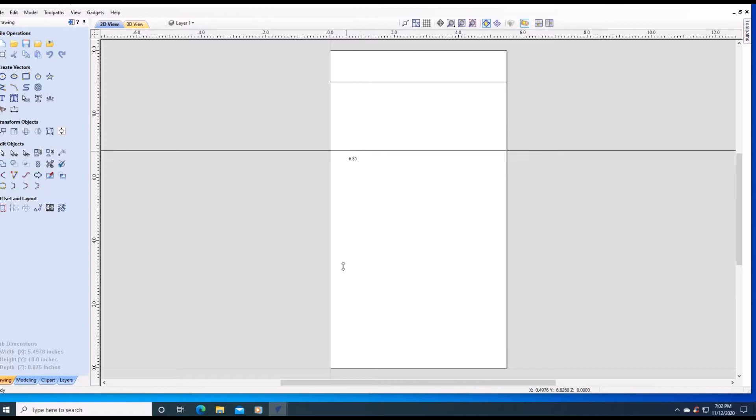So now, spacebar, close. Now what we're going to do is get some guidelines. Left click, we're going to go about 1.75. We need another one about 0.2 for the X. That's going to help us with our project. I'm going to get a line at about 1. Click and bring it down to that guideline, almost to the end. That's going to be the tilt of our Christmas tree. Spacebar, close.

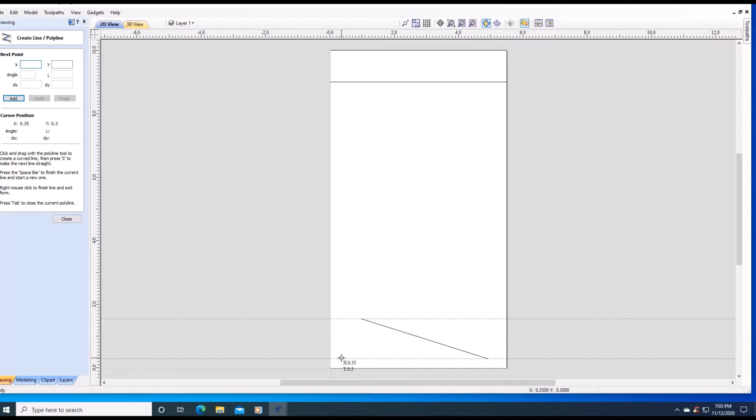Now we're going to start drawing the tree. Another line. Go up, click. A little bit up, click. All the way up, click. Go down like about. Now if you try doing this freehand, you'll never succeed.

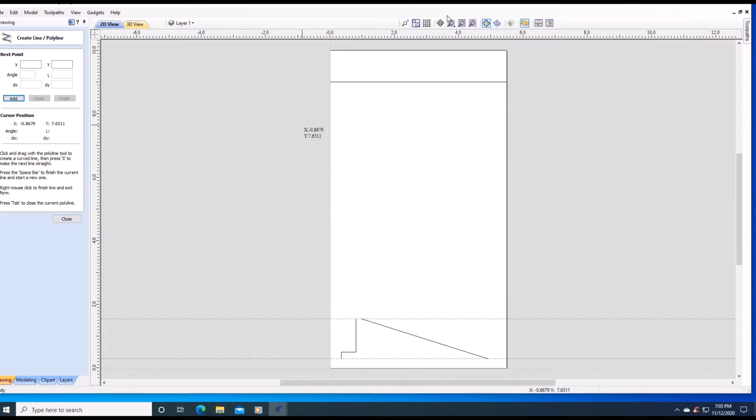So what we're going to do, we're going to stop and put some more guidelines. What we're going to do is close the line, bring down the guideline the other way to the left, bring it over for our first one. Now we have our guideline there. We're going to right click, use the absolute position, and we're going to space our branches at 1.25, then at 1, 0.75, 0.5, 0.25 as we're going from left to right.

To show what we're going to do, we're going to use absolute position. Our first one is going to be at 2.25, create new guideline. Our next one is going to be at 3.25, create new guideline. Next one will be at 4, create. 4.5, create. 4.75, create, and that's going to take us almost to the end of the tree, so now we can close.

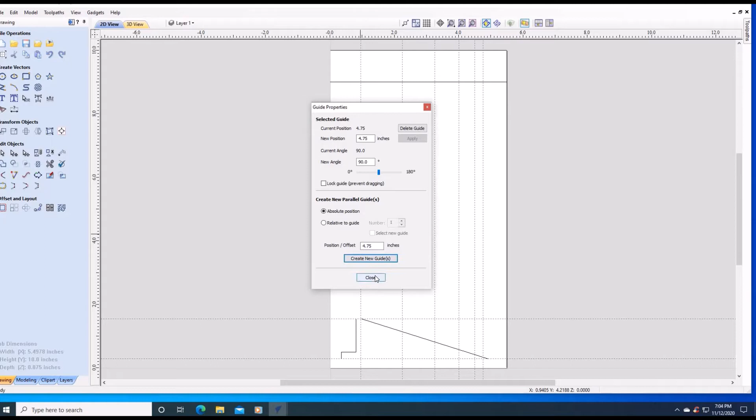So now what we can do, because we didn't hit our guide, we're going to just cheat a little bit. We're going to go to node editing, and we're going to move this node up, and then move this node to touch. So we're cheating a little bit, but that's alright.

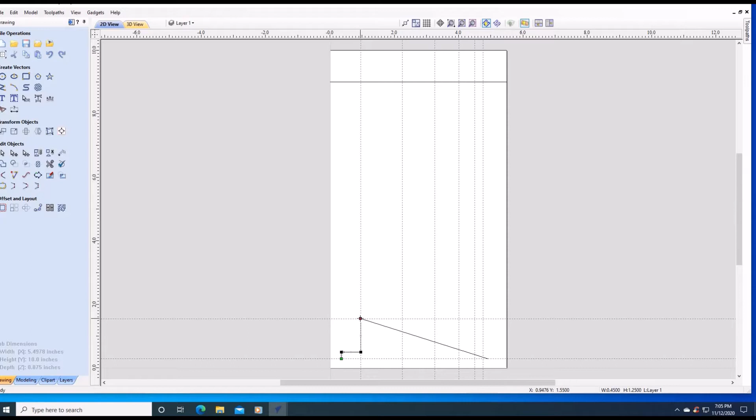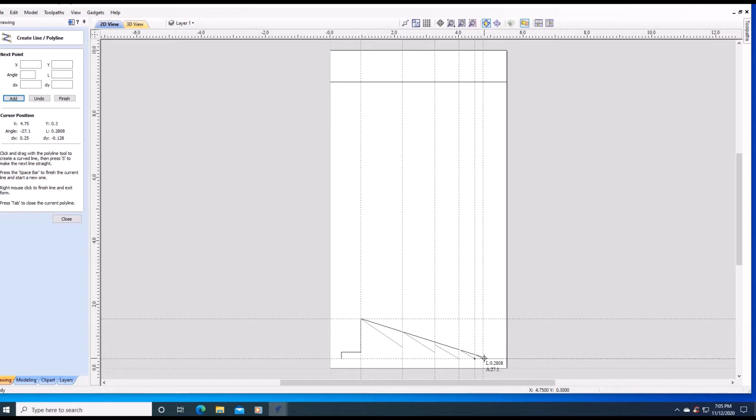Now we're going to continue from here. We're going to click, add another line. Going down, and then up almost to the line. Click, go to the next one. Down, go up, click, go down. Go up, go down, go up, and down. Spacebar. Now we got our branches for our tree.

Click on that line and we'll get rid of it. So if you look, it's alright. How do we end it? Well, I say we put a circle on it. That's a little too big.

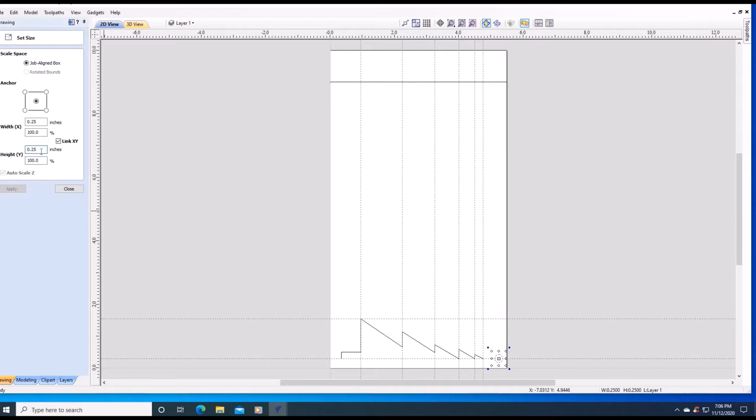Close, we're going to resize it. We're going to say the height, let's do a 1/4 inch circle. Click OK. That looks a little too small. So let's go like 0.35. Apply, let's move it over. That looks pretty good. So now we're going to magnify it because it's really small.

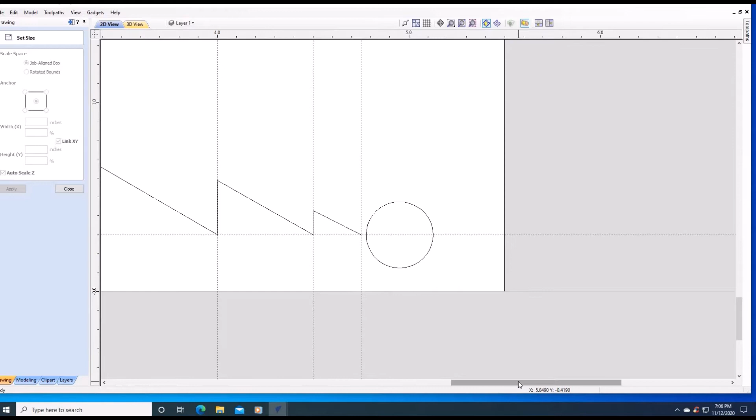It's not touching, so we'll move it over. Say touch. Now we're going to close this, and go to node editing. Click right here, and cut vector. Click right here, cut vector. That's what we don't want. So there we go to our circle.

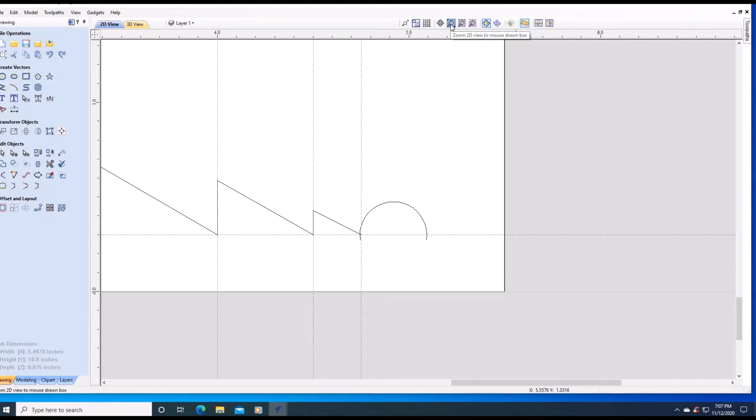Now I'm going to show you something that's wrong, but so you learn how to work your way through this. We're going to go back to node editing, and finish this up. Go all the way to the bottom. Right there, we got a problem because they're not connected. So click, and click, click, so they're joined. We have one open, one closed. So that looks good. So when we click on it, now it's still not done.

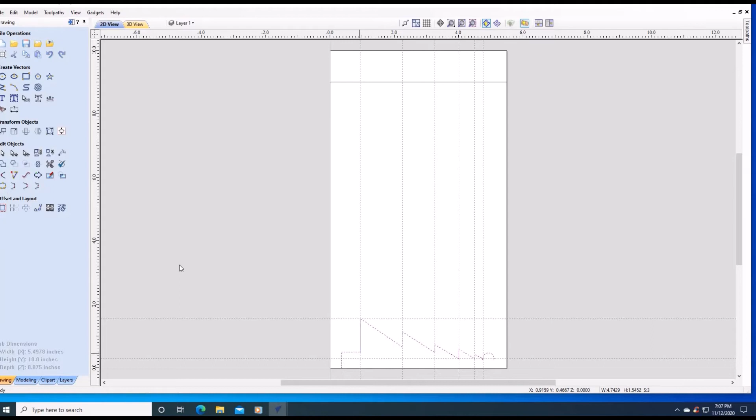Click, shift, hold the shift, click on that, then join again. 3 open, 1 open, join. That looks good, close it. Click on node editing. Bring this one down.

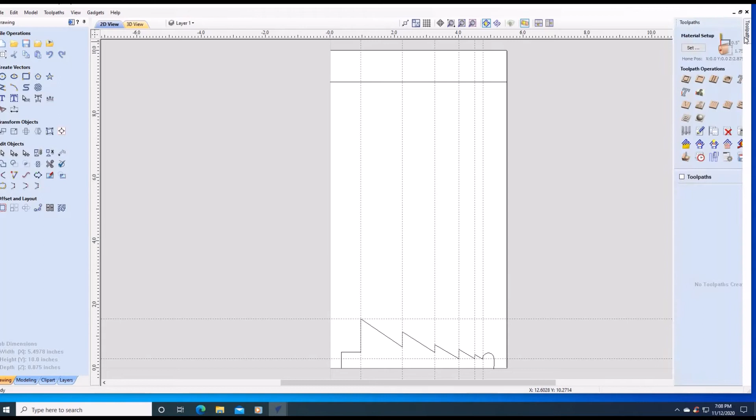Let's see what it looks like. So we're going to go to toolpath, and we're going to lock it in place. Click on the line, hold the shift key, go to the moulding toolpath, pick the Christmas tree, and calculate.

Warning, the tool cut through the material. It's too high, we have a problem. Okay, I messed up. When I told you the diameter is 1.75, when you divide it by 2, half of that is 0.875, not 1.75. So I was way too high, that's why my moulding toolpath did not work.

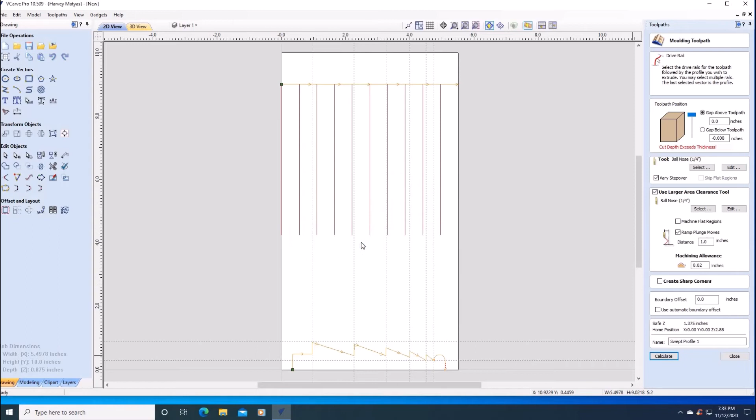So off camera, I did some fixing. Again, we're going to click the line, moulding toolpath, click our tree, click OK, calculate, cut through. Okay, I'm off by a little bit. That's a tree. Now, if you notice, it's not a circle like we were supposed to get.

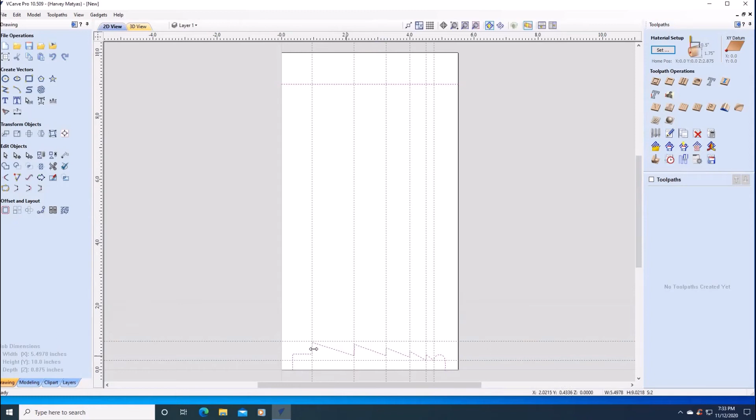So what you need to do is go back, delete these, and fix it. Do it all the way, go back. While we're doing that, we're going to lower it just a little bit more in node editing so that.

Okay, sorry about that, I had to cheat. But what I did off camera was, because you cannot back cut on something, the circle here, I started here and I had edited it so that the top of the circle ends right at the tip. So when it cuts, it'll go around.

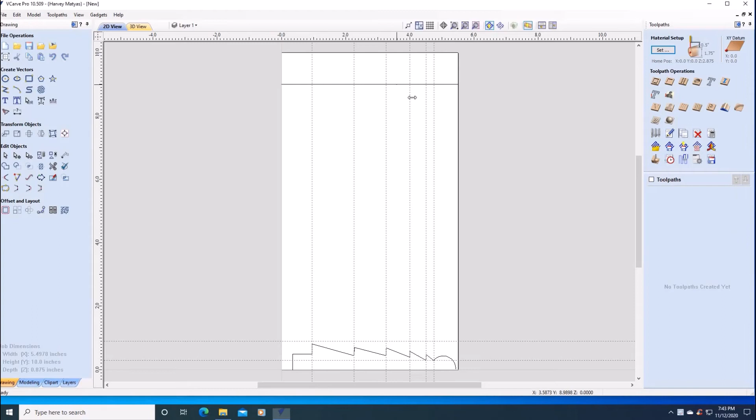So now, click the line again, do the moulding toolpath, click here, calculate, and there we have it.

Now, what I want to do, we could leave it that way, but I really want to have some room so I can sand it. So the next thing I'm going to do is go back to 2D. And you see here where our project begins and ends, I can draw lines so that the machine will cut it for me instead of me doing it myself.

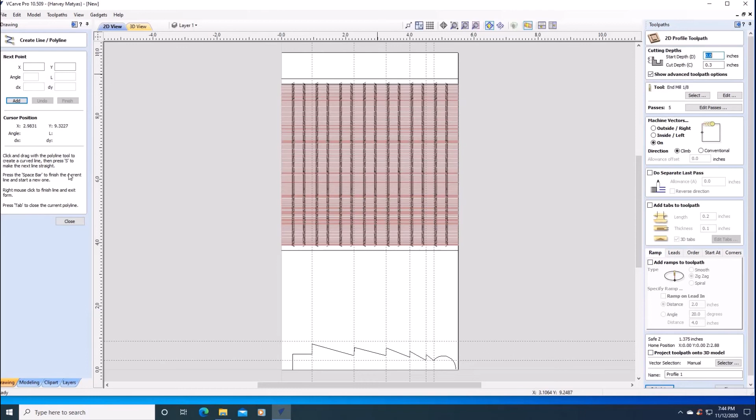So let's go down like 3/10 of an inch. We're going to go on the line. We'll do it for both this and this. Calculate. Reset preview, preview all tools.

And there you have it. You can sand it. If you want, you can give yourself more room, put another line there, or cut a wire out, and that'll be your Christmas tree.

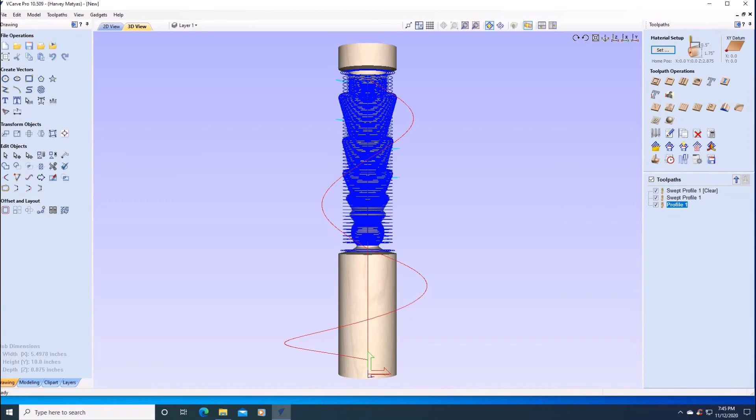The beauty of this software is, okay, you have your tree, you can make another one with very little effort. What you can do is delete everything here, save it, which I already did, delete the profiles, the toolpaths, delete all, then go to your tree, go to node editing.

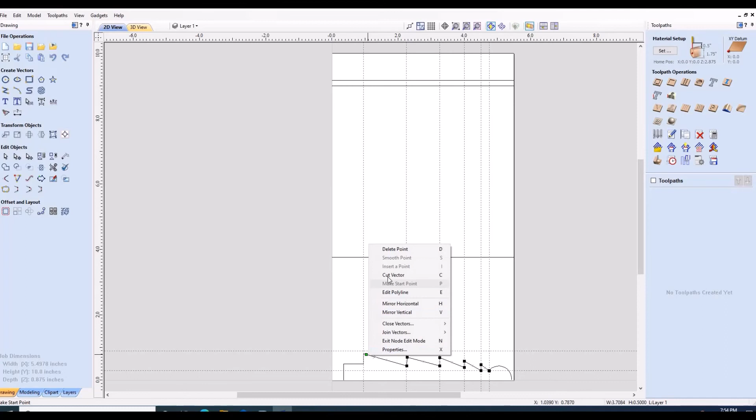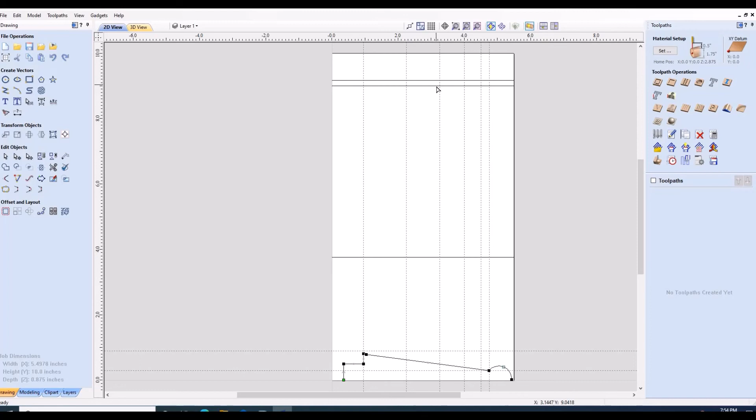Cut vector, delete. You can highlight this in, and the other end of the tree, close with a straight line, go right back up to this line here, molding toolpath, your tree, calculate, and there you have your Christmas tree. And you can still use whatever.

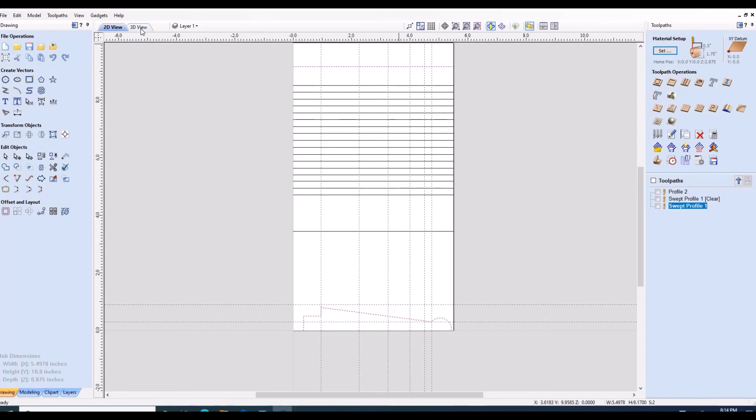Now, once you have this tree, you can still modify this tree to make it even better. The beauty of this program is by making a few modifications to your project, you can make almost completely different ornaments. In this example, I put some evenly spaced lines, did a profile toolpath, then I did my molded toolpath, and I created this tree, completely different.

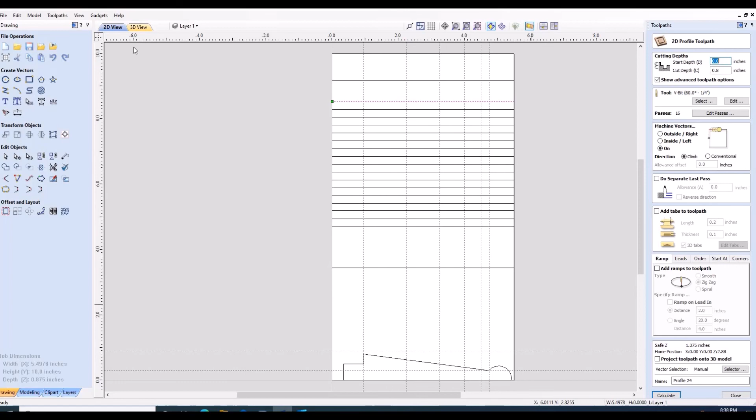And I was using a 1/8 inch end mill. I could then switch this out and go with a V-bit. You can do a bunch of different things. In this example, I used a 60-degree V-bit, and each one at the very end was 0.8, but the first one was 0.1. By doing that, this is what I created.

At the top, it's all sharp, and at the bottom, it's not. So it depends on what you're trying to accomplish. You could do a lot of different things with basically a few V-bits, some end mills, and the sky is the limit for designing things. Thank you.